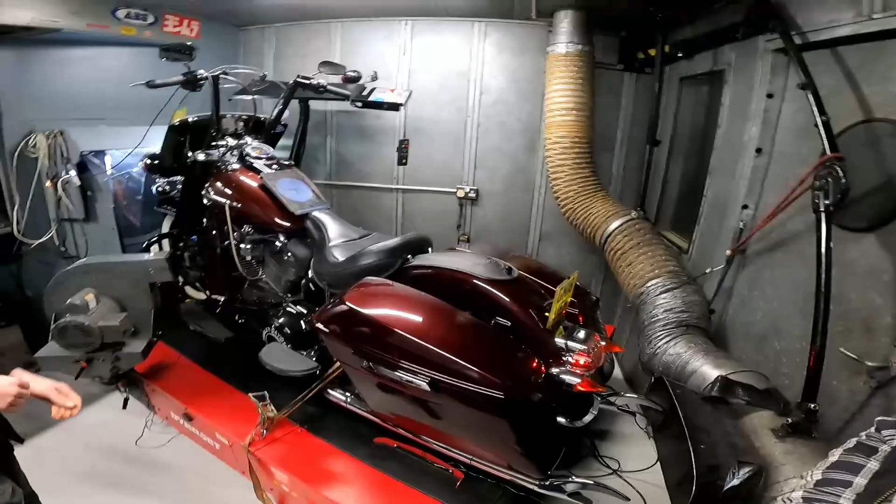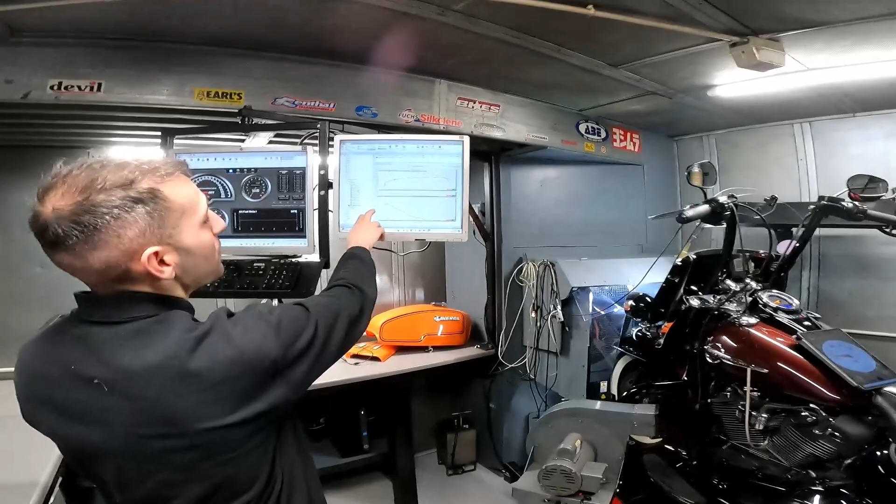Up the top end, it's really quite rich. That's what he was saying, yeah. Yeah, it's quite rich. What end? At full chat, so 100% throttle, anything from about 30-40% above 3.5. You can see on there, that's your air fuel scale. That's on the front cylinder. As soon as it gets to 3,000 revs, it's going down, and that's after about 20% of the fuel pulled out already.

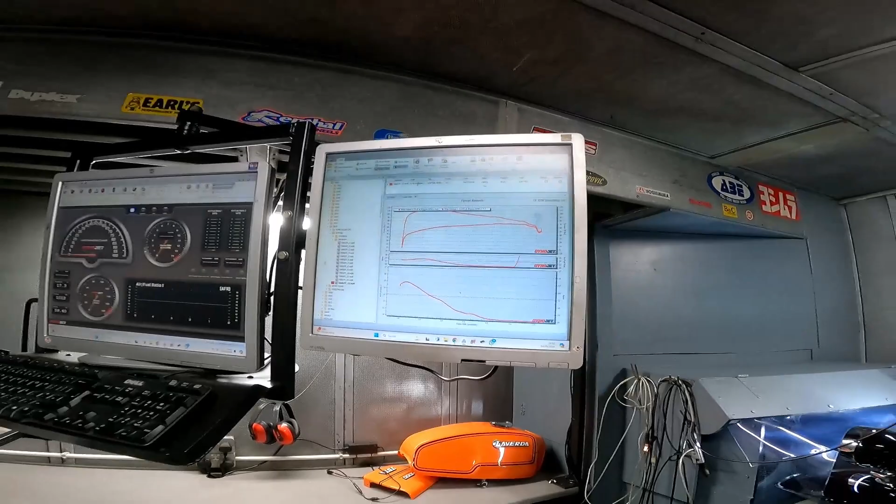But yeah, it's just putting more and more out. I think what's happened is they've put the wrong map in to begin with, which was way too rich down the bottom end, and then the map they've put in, which has made it better, is pulling that fuel out and putting it at the top end. So it's made the bottom end feel better. But these big Harley engines, they will pull anything. They'll pull when they're dead lean. They'll still make power, but it just muffles it a bit. It just stifles it. But yeah, we'll see where we're at now.

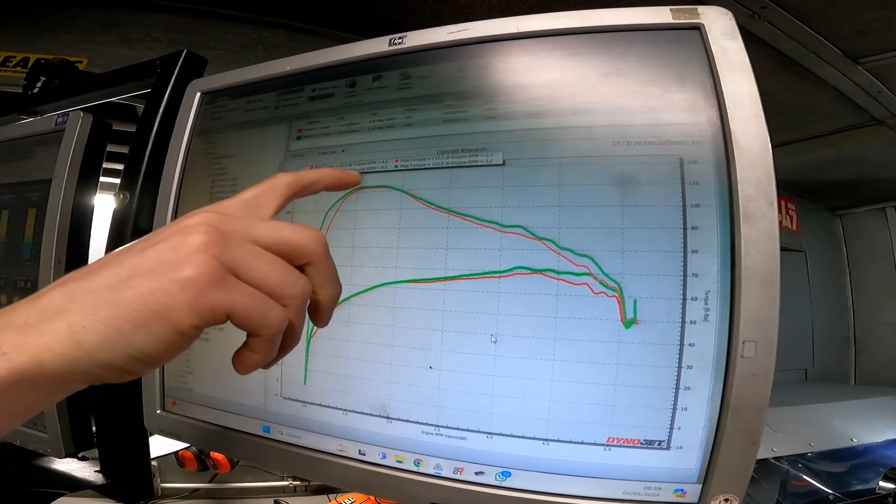Do you think it's getting smoother? Oh yeah, definitely. Wow. Better and better and better. So you see the green run was with some changes in. That's just all the fueling. So just adding the fuel there and taking the fuel away there, just bringing it up, smoothing it all out, making it rev on a little bit more.

Excuse me a second. Have you only got plugs or oil? It's in the white box on the counter. Oh, it's in the white box.

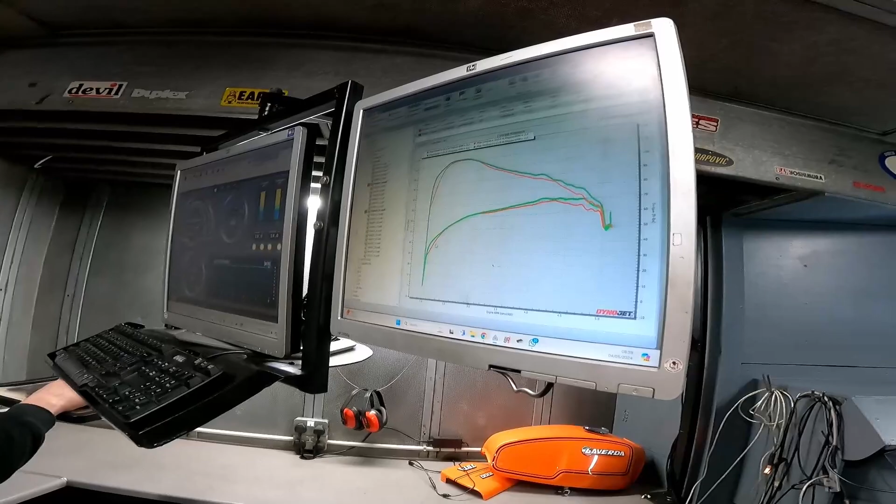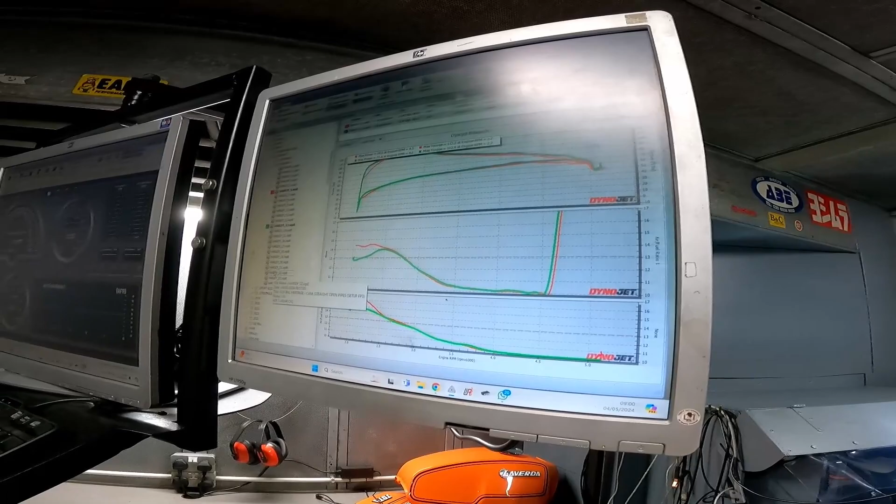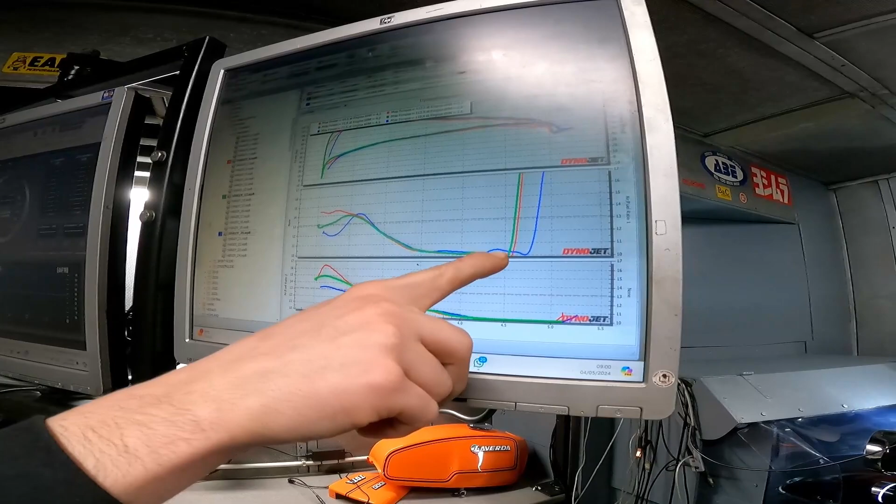And what is this one? That's the first full throttle run against the next run with some more changes in. So put on some of the fueling charts. You'll see. So you can see it's still running really rich and still pulling more fuel out. So it's going off the scale. That last run is just where it's come up a bit more and you can start to see it. If we look at some of the, try and get a good comparison somewhere.

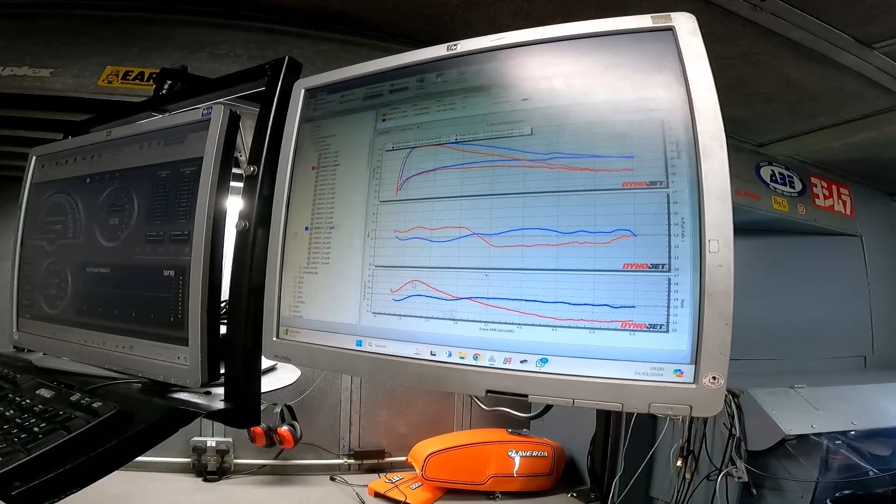I mean, that's what we're trying to do, is that air-fuel ratio there. So what we're doing, pulling the engine down to about 1500 RPM, winding open the throttle, so that's about 25% throttle, and then we're releasing the engine and letting it rev out, and we're sampling what the air-fuel ratio is doing. So anything higher is going lean, anything lower than the red line is going rich. And we've set the AFR target in the ECU to be 13 to 1, so we should be getting an air-fuel ratio of 13 to 1.

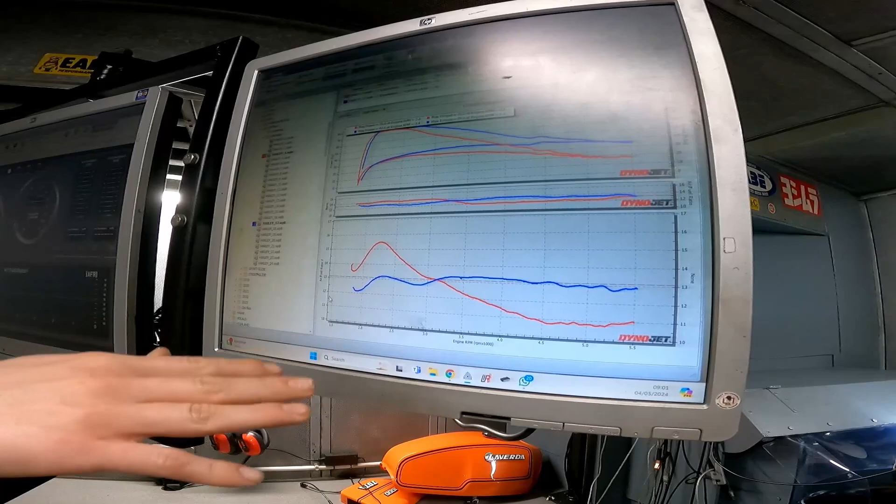So where it's going up and down there, we're telling the ECU that it's getting more air going into the engine, so it can calculate it needs to put more fuel in there, and then it's not getting as much air in there, so it's giving it less fuel. So we're trying to get it on this dotted line to begin with.

Then when we've got it pretty much on that dotted line throughout the tables, we then can go into the air-fuel ratio target in the ECU and adjust that so we want it to run a little bit richer at full throttle, a little bit leaner where you're cruising to get better economy, and it's just trying to even out all these hills and hollows and smoothing it all out. But it was well out. It wasn't the worst I've seen. It's just could be a lot better, especially once you get going.

Yeah. Over a long period of time, would that have done anything detrimental to the engine? Or like, say if we went where we're going to go and you're sitting on motorway speed, 83 mile an hour for long periods of time, would that cause any issues? This particular bike probably wouldn't, it wasn't so bad. Cruising would have been alright. When you whack the throttle open, it would have gone rich, but it would have been safe.

You get a lot of these bikes where, like you found the first map, where it's going really, really rich at the bottom end. All that does, it just blacks all the plugs up. We've had two bikes do it, where they've been running that rich, riding around for a couple hundred miles before they've got to the dyno centre, and it blacked up all the plugs. Then the plugs can't fire, then the coils will malfunction because it can't release the energy. So we've had some where they've destroyed all the coil packs because it's sooted itself up that badly.

I mean, I've pulled the plugs, you know what I mean? It's just had new plugs. Like I say, I've pulled the plugs and they was a pretty good colour. Yeah. Well, yours was alright. I don't know what it was like on the old map. The original, when I first picked it up, all they did was basically flicked it to the cam that it was running. I don't think anything else was mapped. Not bad, you know what I mean? Well, it's what they do.

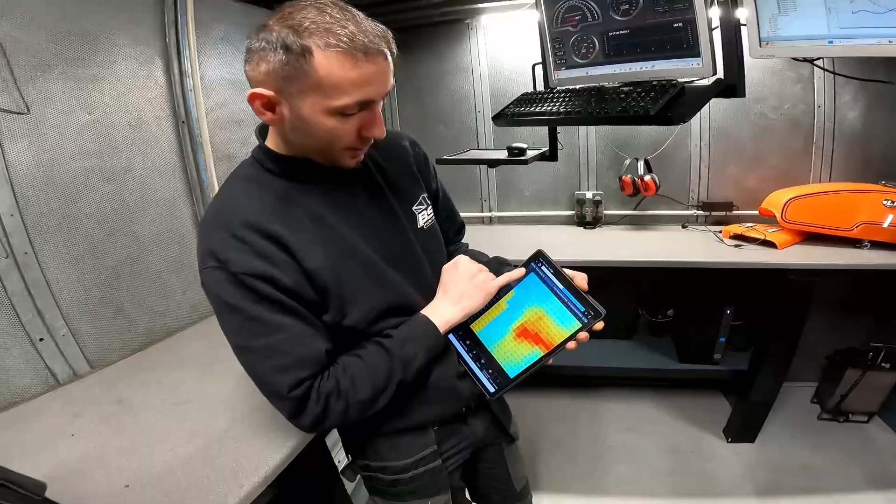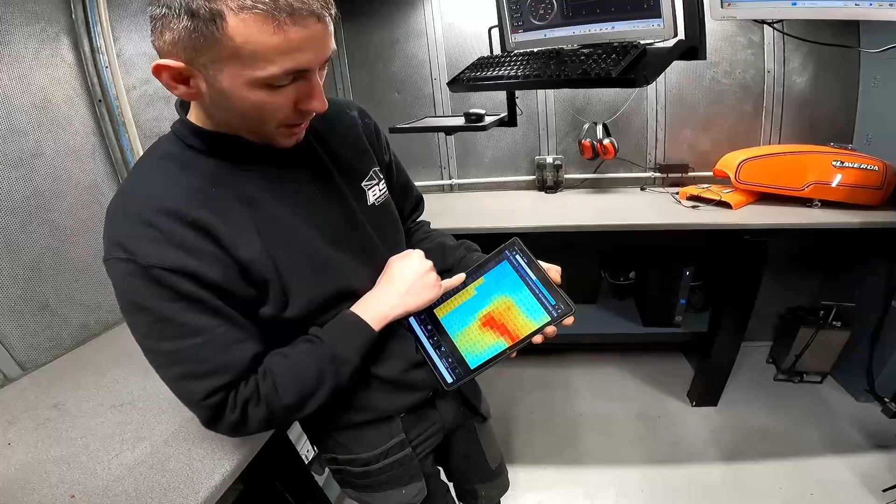All that does, they'll have like a preset, you can select which cam you've got, and it's sort of got a preset table of how much air it's, so they're all the VE tables. So you've got across the top throttle position, so 3, 4, 5%, idle's about 4 or 5%, all the way up to 100%. And where you are on the RPM level, it gives you a number. The maximum we allow in there is about 130.

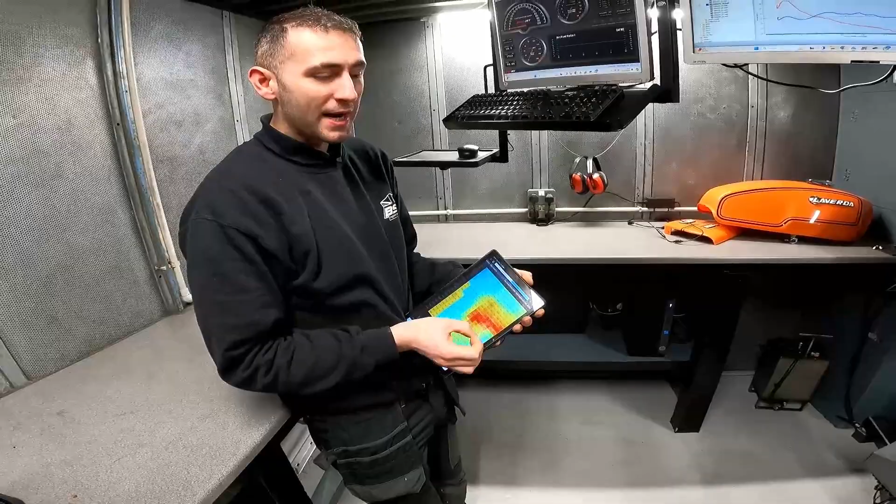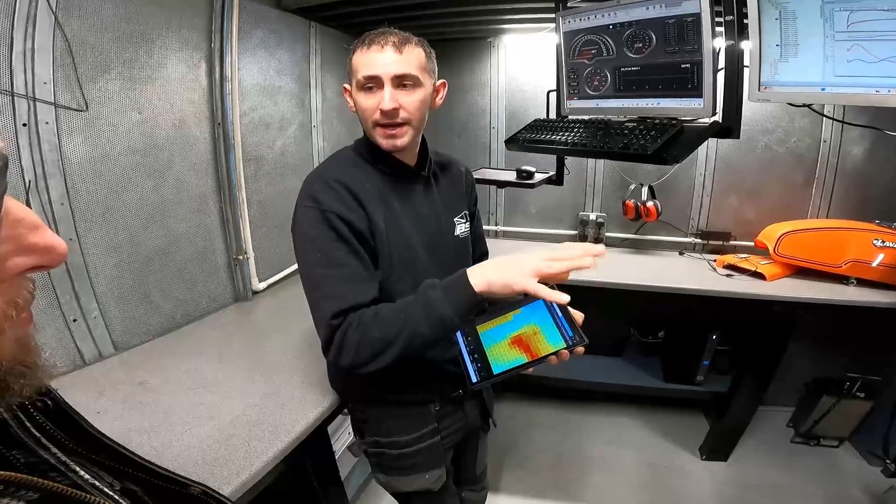And basically what it's saying is the amount of air that's going in the engine at one point. So the bigger number, the more air it's expecting to see in the engine, and then the more fuel it'll calculate. You go into your air fuel ratio table. That right there is an AFR ratio.

So I've set it to 13.2 air to fuel ratio, which is where my dotted line is on there, if you see. When it leaves here, it won't be set to 13.2 still, it will be altered, but you need to be able to achieve the number it's set in the ECU before we can make sense of setting all this table.

But yeah, that one works in manifold air pressure, believe it or not. So instead of using throttle position, it works at vacuum pressure in the manifold, which is you're cruising around sort of here, 30-35, and then that's full throttle. Shut off is on this bar column, and as you open the throttle, you move across like that. And I'll show you this once I've set it to begin with, because what you're trying to do is set this so you've got an economical air fuel ratio.

Because it doesn't matter if you set to about 12.5 or 13.5, you'll get the same power. Any past that, your power will taper off if you go too rich. But you want to be cruising where you're not drinking loads of fuel. But as soon as you roll that throttle on, you want to give it as much fuel as it needs. And then at full chat, we actually run them slightly rich so that they're safe. That's all I want, is it's safe.

Yeah, safe. And in Harleys, they've got something called performance enrichment, which is a program. So when you whack the throttle, you can set it in here somewhere. But yeah, basically you set it to come on at a certain throttle position and a certain RPM. So on these, they're about 4,000 RPM and higher, about 80% throttle and higher. So where you're really whacking it open and going, it enters into a program where, depending on how many seconds it's been in that state, it will add more fuel and more fuel and more fuel.

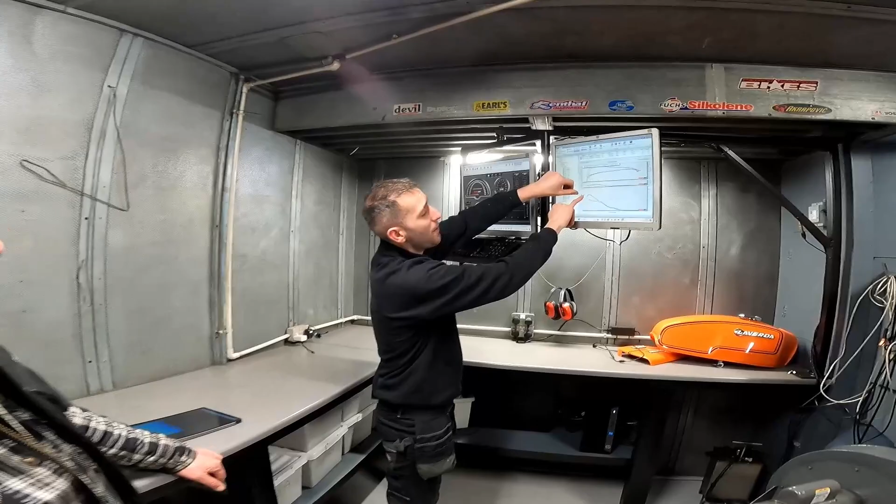Vance and Hines has a facility called an auto tune sensor, and it doesn't work at all, because all that narrow band sensor can see is about my finger and above, and it can't see anything that's going on down here. So it ends up running them too rich. They always say you're better off with wide bands. Yeah, you've got to invest in wide bands, but a lot of the time you can't fit them in the exhaust because they're physically a lot bigger. So it's a lot of messing about.

Truth is, once we've set it now, that'll be set, and that's it. That's great. As soon as you start fitting the auto tune wide bands in, they're constantly adjusting themselves, and you get air pulsation on a lot of these. If you've got quite short exhaust, as it pushes gas out the exhaust, it actually pulls air back in. So you're better off with longer exhaust. Longer exhaust helps with bottom and mid-range. Short exhaust is good for top end. It reduces the back pressure in the exhaust.

But what you've got for touring is perfect. That's ideal. Well, it's an all-rounder really. Sometimes it's got no screen and bags, you know what I mean? So it's a bit of both. Yeah, good all round. But it is basically a tourer. The last thing you want to do is go abroad, annoy everyone, and then get fined for the exhaust noise. Well, it's only got really bad since putting the cam in. It weren't too bad before, and I didn't have baffles before.

Now I've had to make baffles, and they're sort of that long. Yeah. Even though they're sort of still straight through, it's got baffles in it. No, that's fine. It's not the worst I've heard. You see a lot of, there's a make called Jekyll and Hyde. You've seen their exhaust and they come with the exhaust flaps in. That's a bit of a clever idea. Yeah, it is. They're pricey though. They are. I mean, I know there's a lot better exhausts.

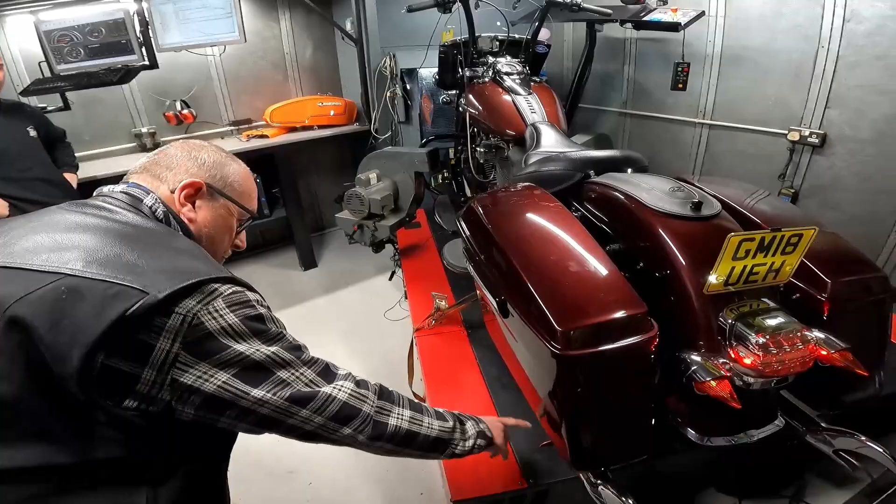I mean, it came with these exhausts, not these. Obviously, we put these on, and I had to make them to save cost, but I can get new ones and they would be longer. Yeah, no, what you've got is fine. If you're chasing every last bit of horsepower, which I never was, you know what I mean? All I wanted to do originally was upgrade, because this is like one of the first ones being made, so it had the lower spec oil pump, so I just wanted to update that,

And that was really it. You know what I mean? And Mark said, well, why don't we just put this in it? So it was buy that kit off S&S and all the bits. It's fine. I mean, you look at some raw power, we're not even up to full power yet, but if you compare some of the stuff people do on them,

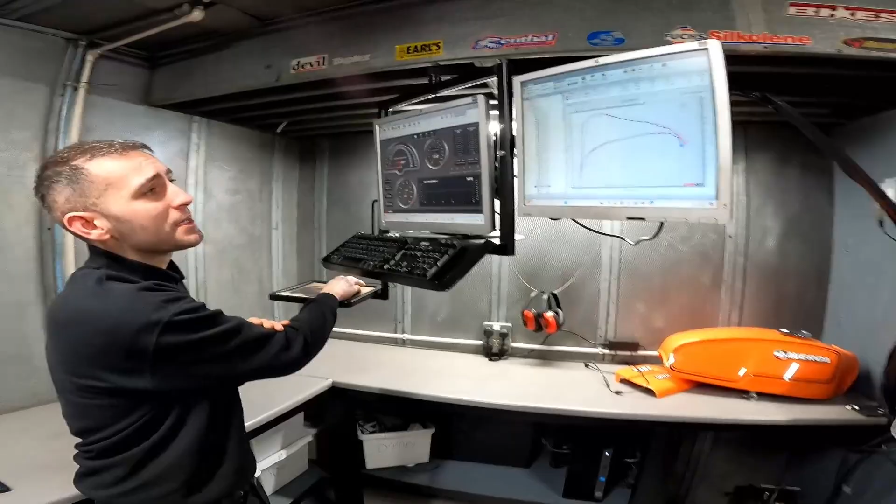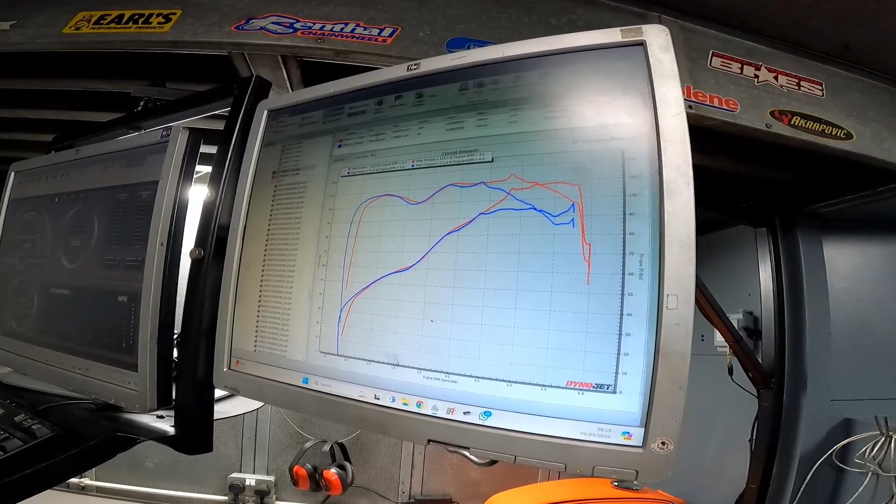I'll show you some of the different cams people put in, and a lot of people get it wrong, and they put in horrendously horrible cams which end up ruining the bikes. I'll show you one we did the other week. That's got a 2-into-1 system, so you get this bit of a surge. There was one that I did the other week, and it's a perfect example of it. With the 2-into-1 system, standard cam.

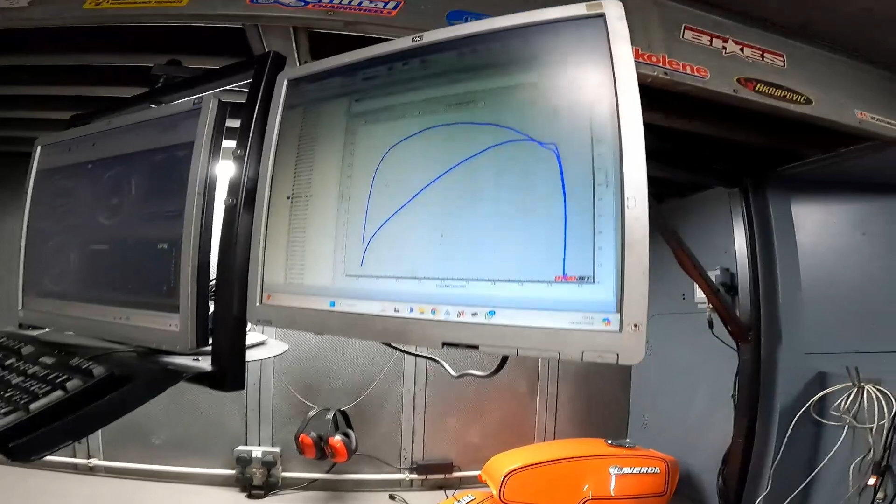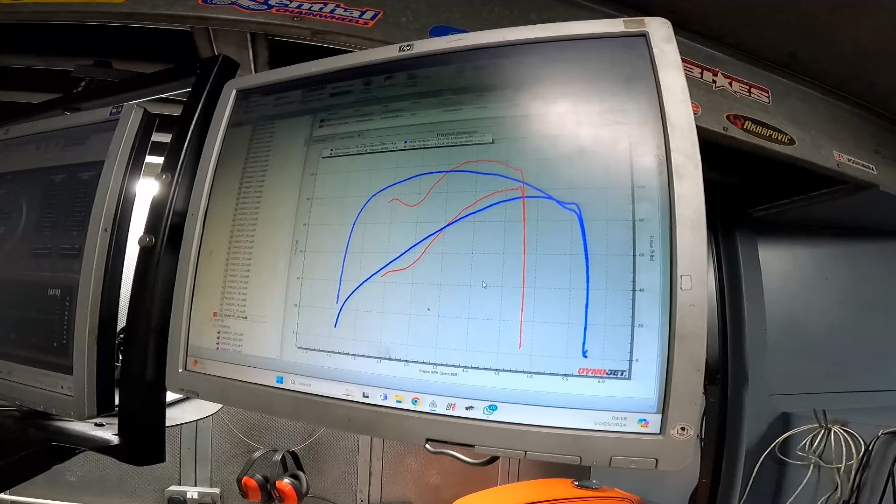Once we set it up for the standard camshaft, it's got a lovely torque curve, beautiful. And then he went for a power cam, and what that does is that. Wow. So that's not revved out, that's in a different gear, but you've lost all this bottom end torque. Look where you're on the RPM, 3,000 revs. So you're down all that power, and then it just ramps it right at the end, and it gives you the horsepower number.

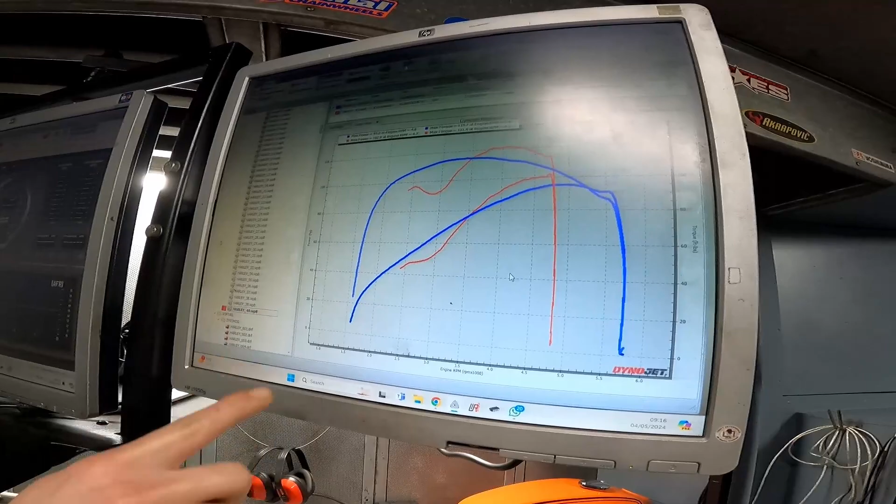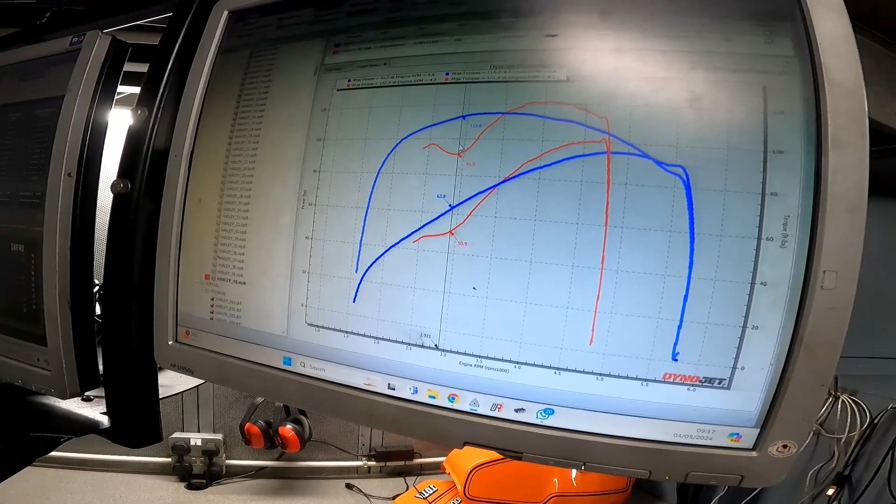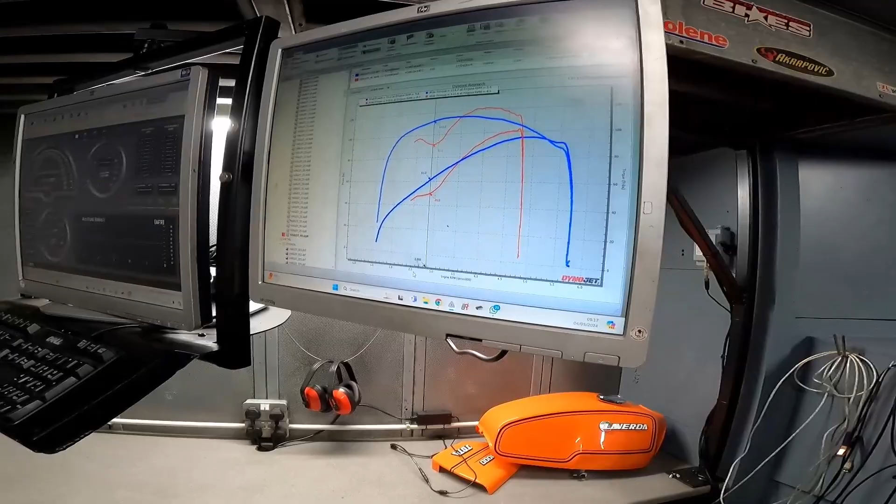So horsepower wise, you're looking at it going, oh look, it's got another 7-8 horsepower, lovely. But where you're riding it, if you look here, you're down 20 pounds-foot of torque, 25 there almost. The numbers don't really mean anything until you use it on the roads. Yeah. So even now, I'm going to notice the difference. Oh yeah, you'll notice it'll be a lot smoother.

Don't get me wrong, it's not chalk and cheese like some of them are. Some of them come in running so poor, coughing and farting, and when you leave, it's smooth again. What you'll notice, it'll be a bit sharper everywhere, a bit cleaner. You might get a bit more fuel economy back, because although the AFR target was set quite lean, it was over-fueling the VE table, so it sort of cancelled itself out. But when you're cracking on, it will pull harder at top end.

Okay. Cool. But yeah, I'm going to make some more changes, maybe run it once more, and then that'll be done, and we'll be away. Okay. Right? Okay. Go on, it's your bike, mate. I'm just...

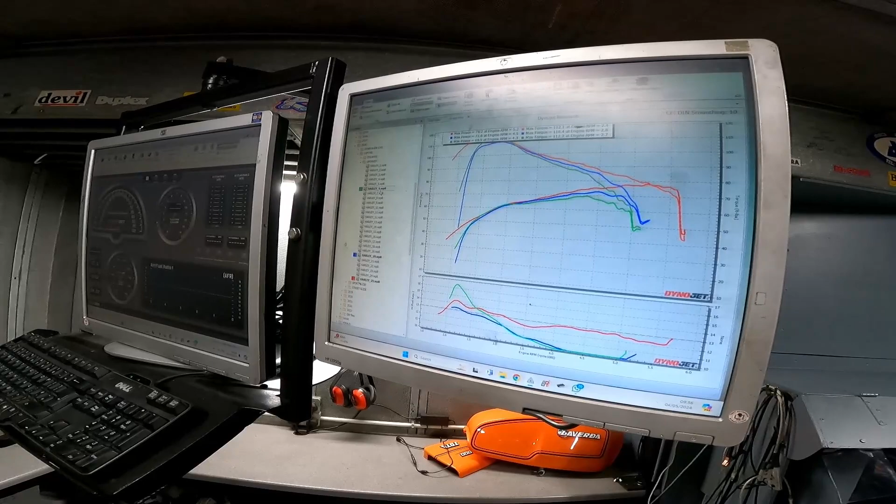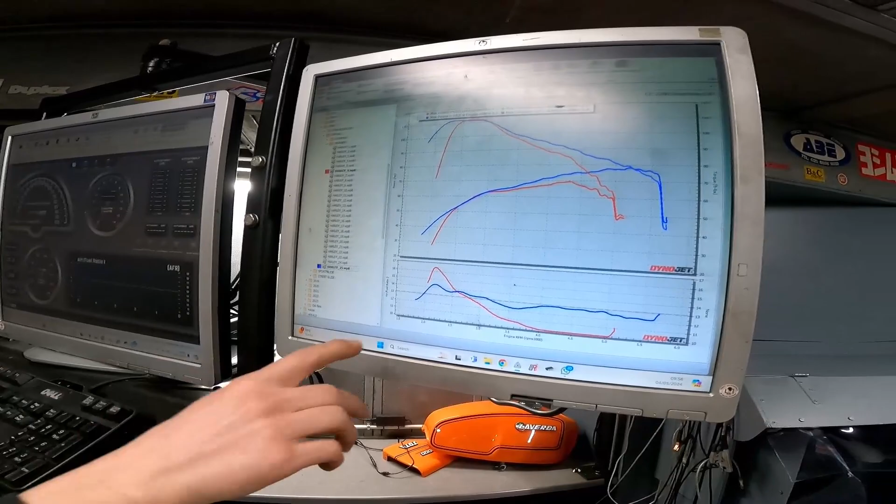That's the final result. You can see that red one's the last run. That's the first one. What? The one at the top was the first one? Yeah, then number 6, and then the last one there. And if you look at the air-fuel scale, you'll see that red line where it goes all the way lean. That's why the power's down there. And as soon as it gets to 3,000 revs, it goes dead rich and just dies off, whereas now it just keeps going and going. Oh.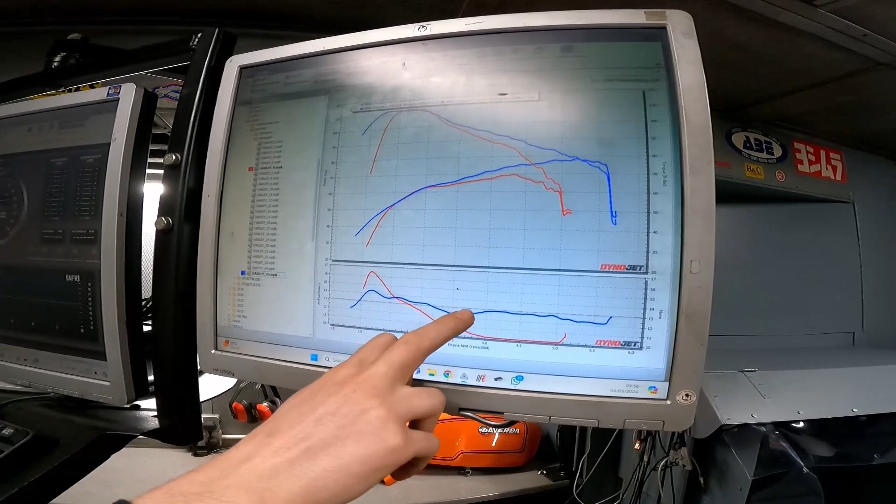But we're trying to get that all. You won't ever get that bit flat, because that's where you're accelerating, so you're winding the throttle open, coming off the brake, and then it's all where it should be now. But that is, I think that's the wrong one there, that's a single grab.

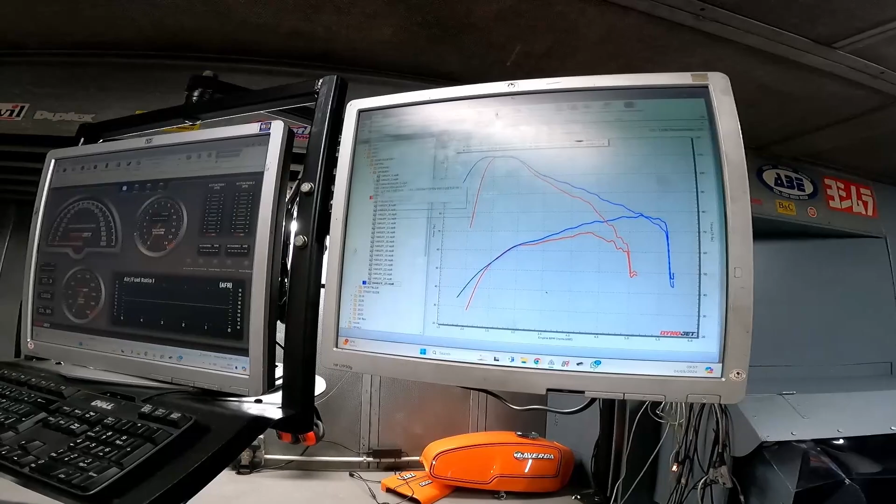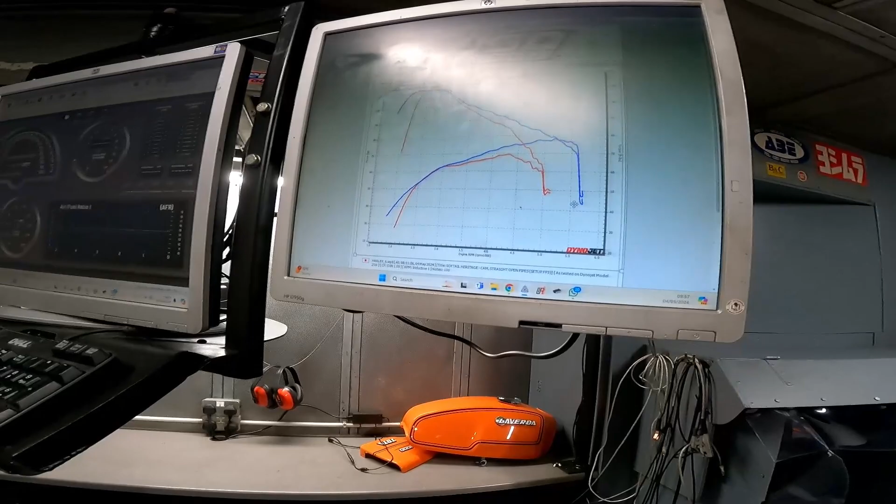That's the difference between... So what sort of numbers was it pulling in the beginning, and what is it pulling now? So the first one was, the max power was 69.5, whereas now it's 78.2. Which is probably not a lot, is it? Because it's meant to be a 100 horsepower cam, yeah. Yeah, I mean that'll be measured at the crankshaft, which is about 15% on top. That is about what it should be. But the torque's not really changed, because obviously peak torque here was where it was kind of all right, but it was just after that it started to pull away.

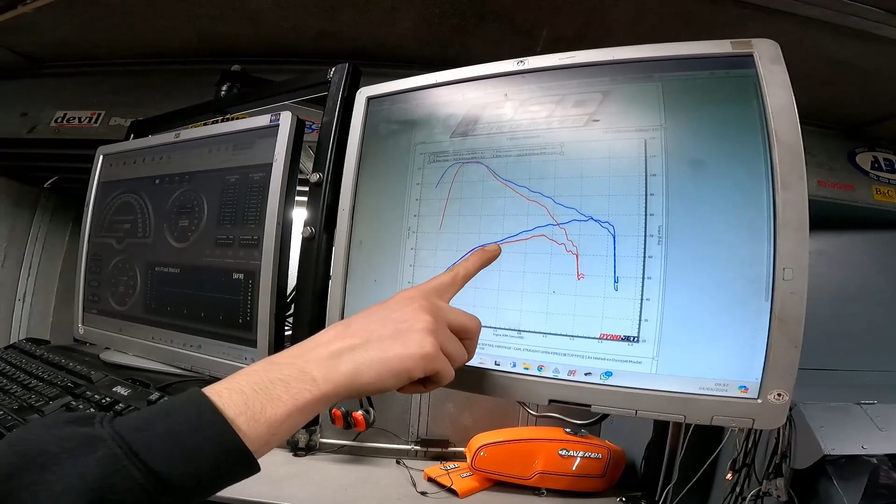Put that one off. Put the wrong one on. But yeah, like you say, it's so much cleaner. It's cleaner, yeah. Let's say, just moderate acceleration, it's not changed an awful lot. It's when you're really pushing it, and just that bottom end stuff, that's where it will change. So it's not necessarily changed all the areas you use it in. Yeah. But it's now riding safe to use. Okay. It's good.

First ride, what's it like? It is smoother, it's pulling better. Happy? Try it. Yeah? Yeah, well pleased. I'll let you do the camera bit.

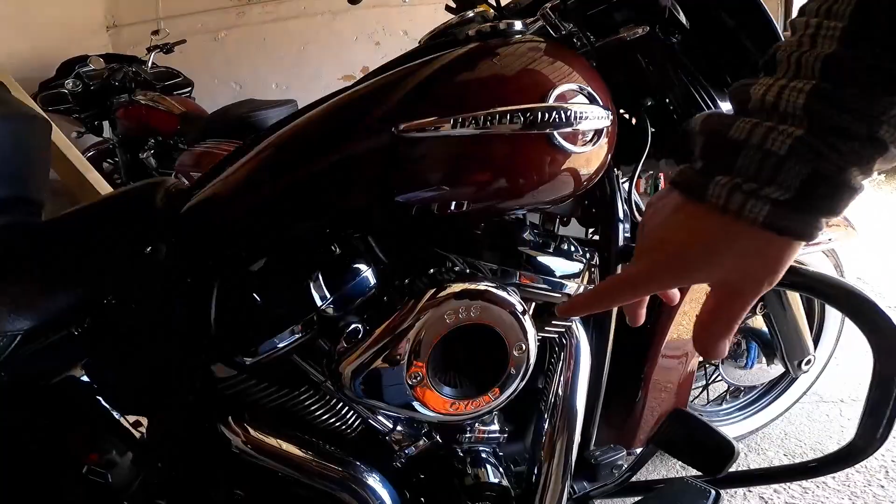So just to remind everyone, in case we didn't capture it before, what did you have done? From them or? From original. So you was a stock 114, as you had it. Full S&S kit, cam kit. Yep. What cam did you have put in? 475, and the S&S filter, breathers both sides. And it is running a Fuelpak FP3. Yeah, which people say you can't tune, and you obviously can. Yeah, they can be dyno tuned. BSD, who we've just been to, they can dyno tune an FP3, and it has made a massive difference.

So I rode this before Dad had it tuned, and from what the guy showed on the screen, you can tell that exact difference. In my opinion, from what I could feel from riding it before, it felt like it was struggling to give you the power, where now it doesn't. It's just smooth right through, and it's just constant power as soon as you're pulling. You change down gear and it flies. It's ridiculous. Yeah, very happy.